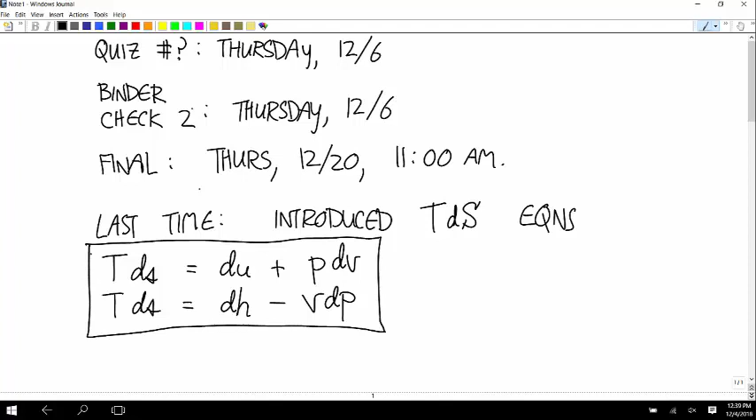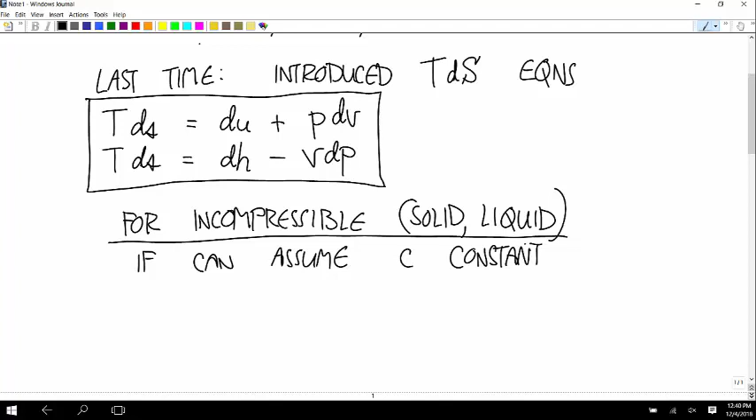Then we had some simplified versions of this. If you have an incompressible material, a solid or a liquid, and if you can assume that the specific heat is constant—that's not always the case, but it's often a good approximation for solids and liquids—then the change in specific entropy is equal to the specific heat times the natural log of the later temperature divided by the earlier temperature.

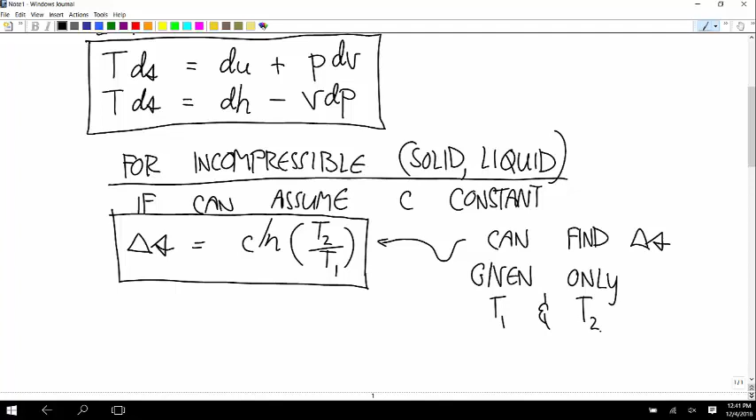What's useful about this form is that you can find the change in specific entropy given only T1 and T2. Just with those two temperatures at the two different instants, you can calculate the change in entropy. Okay, that's if it's a liquid or a solid, if you can treat it as incompressible.

Then we also have an approximation if you can assume a gas is ideal. You get a more simplified form if you can assume that the two specific heats are constant—most of the time you won't be able to do that. So the form we're going to use says the change in specific entropy is equal to S0 at T2 minus S0 at T1 minus R times the natural log of P2 over P1.

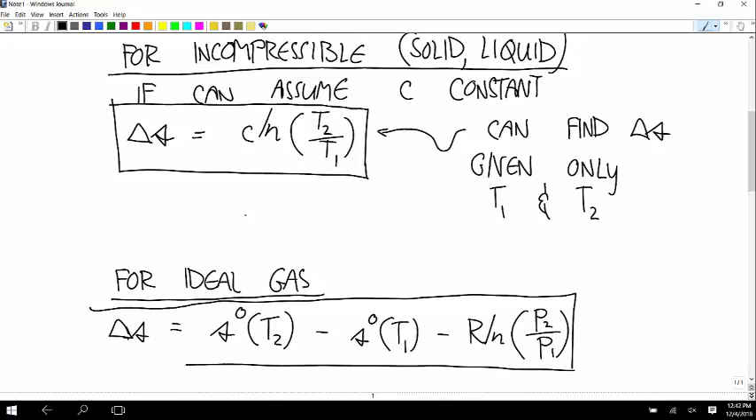So if you can model the gas as ideal, this says you can find the change in specific entropy, not as easily as for an incompressible material, but still given only the two temperatures—and this time you also need the two pressures. So incompressible needs a little less information, ideal needs a little more. But both are simplified compared to the overall TdS equations.

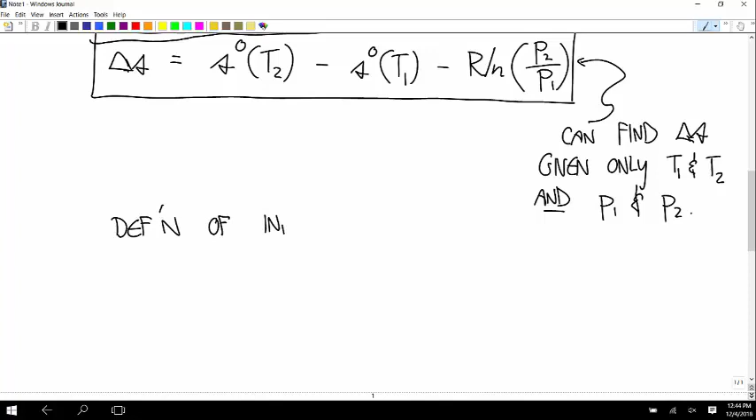So now we have some ways to calculate entropy. We know we can look it up in the table—the definition of entropy. Who remembers the definition of entropy? Okay, so yeah, that's sort of an intuitive idea. Anyone remember, like, mathematically how you calculate it?

So the definition of the entropy change from state 1 to state 2.

The change in entropy is equal to the integral from state 1 to state 2 of, and this is that Clausius integrand, dq over t, over the whole boundary, for an internally reversible engine.

Okay, so what that says is, say that you have a blob of pudding, and it starts at this temperature and this pressure and ends at this temperature and this pressure. How do you get from this state to that state? It doesn't matter for calculating the entropy, because no matter how you get there, the way you calculate entropy is you calculate this for what an internally reversible engine would do, what would happen if you went from this state to this state using an internally reversible process. And that's how you calculate the change in entropy no matter what process it is.

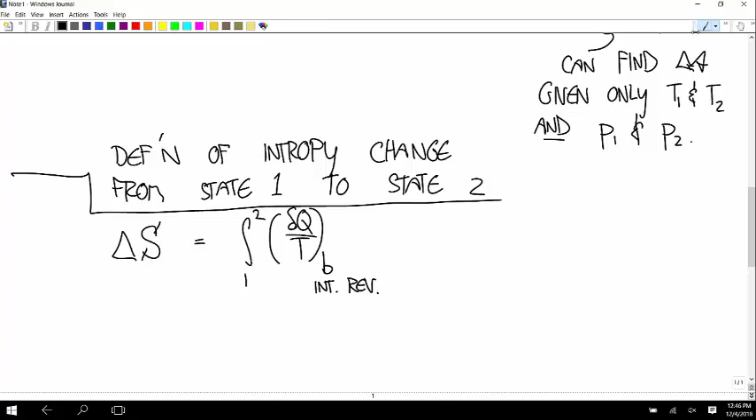Okay, so that idea of an internally reversible engine or process is built into this. Okay, so now we're finally ready to talk about the closed system entropy balance.

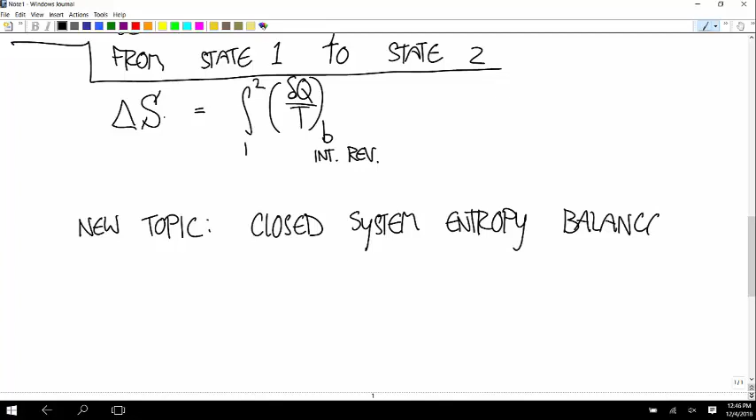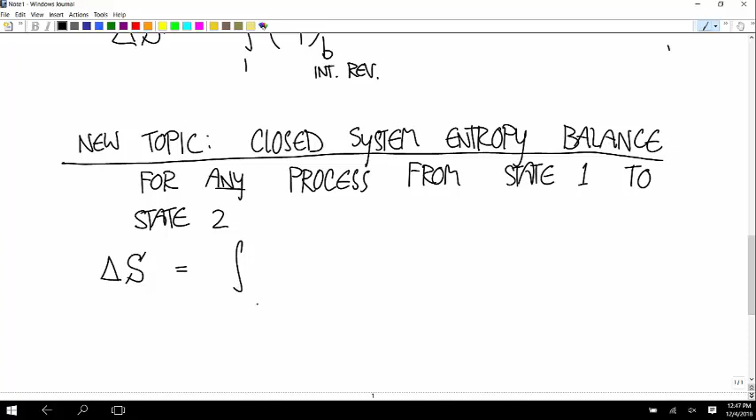Okay, and so this says that for any process, state 1 to state 2, the change in entropy is equal to the integral. Now this is going to look familiar. From state 1 to state 2 of dq over t at the boundary, plus some value sigma.

Okay, so first let's figure out what these different terms say, and then let's figure out what this says about sort of the second law of thermodynamics. This is like a statement. We can think of this as our mathematical statement of the second law of thermodynamics. This is the second law. Basically, the second law is sort of built into this.

So first of all, what's the difference between these two things? This is our definition of the change in entropy, and there's no constant sigma here. And now we have this new thing with a constant sigma here. What's the difference between those two statements? This is important for wrapping your head around this stuff.

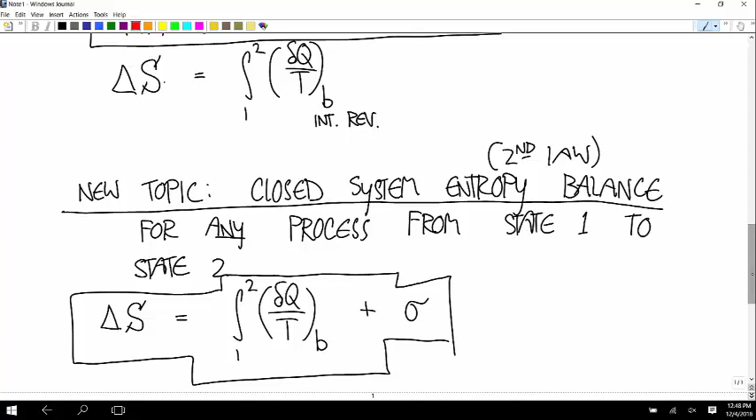So this is what you get for this integral for the actual process, not internally reversible. I mean, it could be an internally reversible process, but this is the actual, what's actually happening in your system.

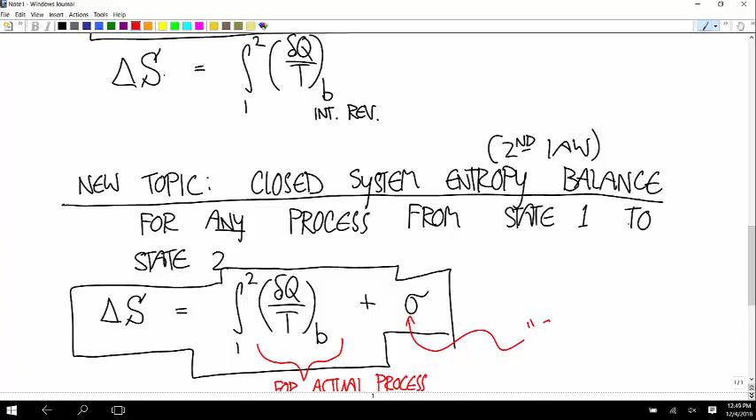And this is called the entropy production. And this sigma always has to be greater than or equal to 0. When would you guess sigma is equal to 0? Well, it's equal to 0 if the actual process is internally reversible. If there's no irreversibilities in the process, then we just get back that definition of entropy, and there's no sigma there. So it's equal to 0 for an internally reversible process.

It's greater than 0 for any process with irreversibility.

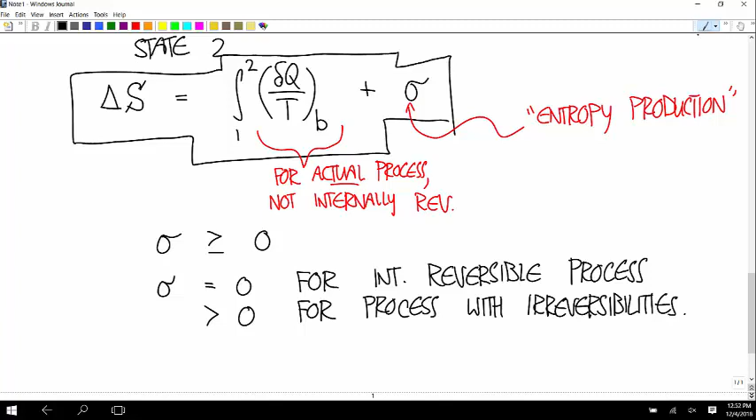So let's see how that works. I'll do an example with a heat engine where it's internally reversible, and then do one where it has irreversibilities.

Well, it's sort of following the same thought process, but make sure that you understand the difference between what the Clausius inequality is saying and what this stuff is saying. All this stuff is subtle, but it's important for understanding how to do these problems.

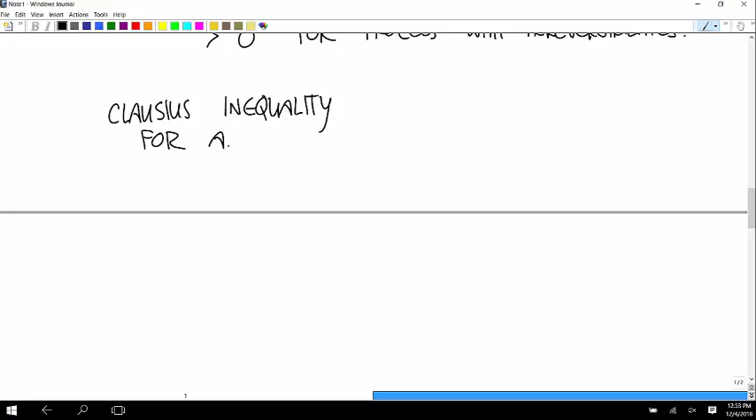The Clausius inequality says that for any cycle, the integral over the cycle of dq over t all around the boundary is less than or equal to 0.

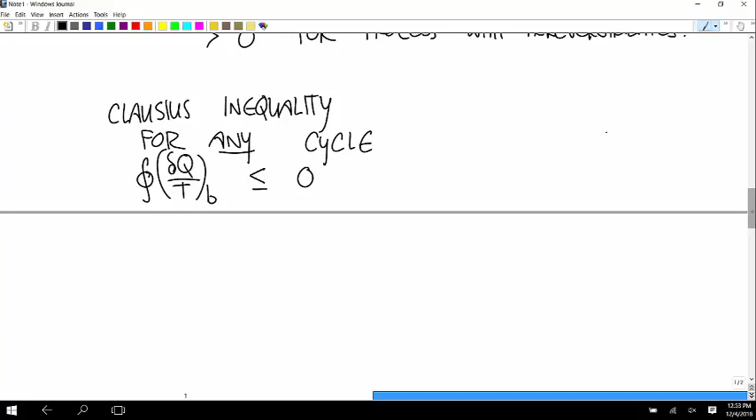So one of these inequalities, this is a less than or equal to. These new ones, this sigma is a greater than or equal to. And we use these things in different ways.

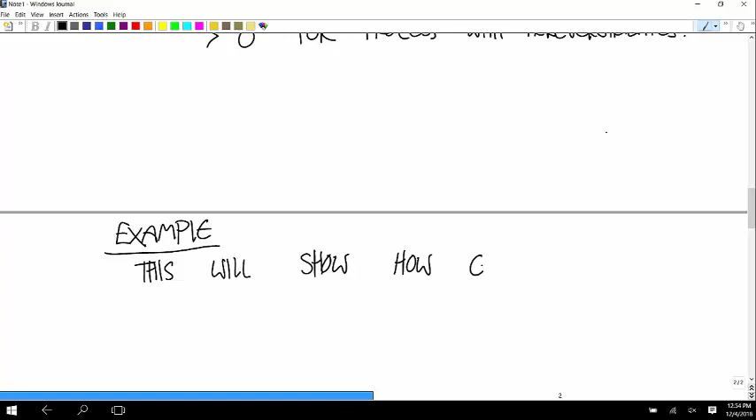Okay, I'm going to erase that. So let me do an example. This is just designed to show how entropy production, or entropy, is produced when a process has irreversibilities.

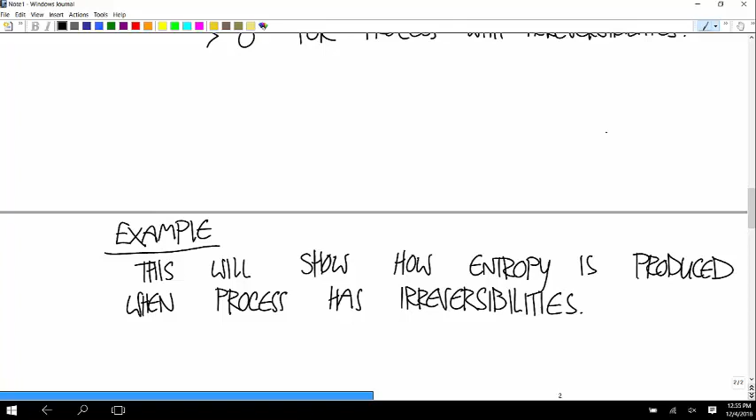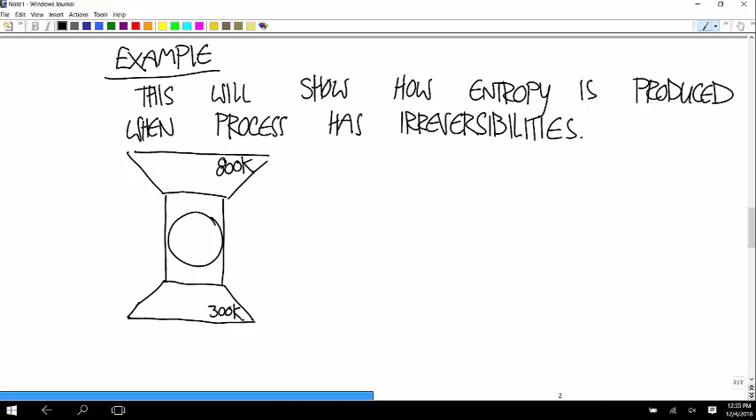Okay, so let's say there's this heat engine. At the hot reservoir, let's say the temperature is 800 Kelvin, and at the cold reservoir, let's say the temperature is 300 Kelvin. It's a power cycle, so work is done by the system. Heat energy comes in from the high temperature reservoir, and that's, let's say, 1,000 joules. And then we know that heat is going to be lost to the low temperature region. I'm going to call that QC. That's going to have different values for reversible and irreversible.

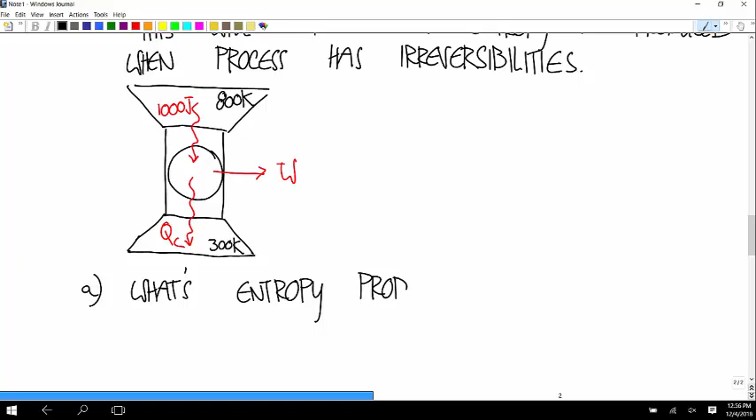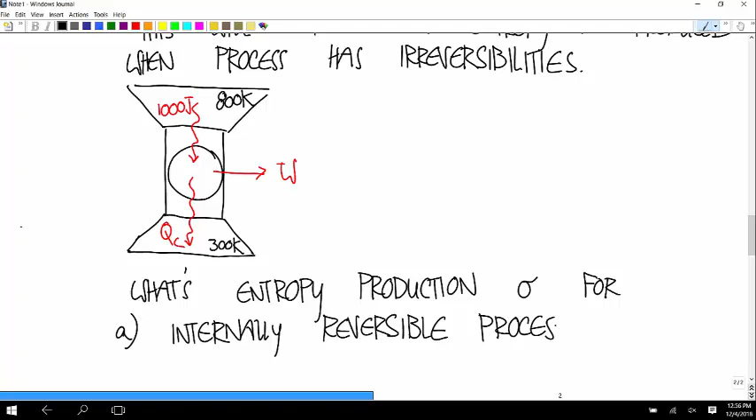So what's the entropy production, sigma? We're going to do this in two cases. What's the entropy production for part A? Let's do it for an internally reversible heat engine process. And then second, with irreversibilities present. Okay, so

Before we do this, what do we expect the numbers to show? What do we expect to be the entropy production for an internally reversible process? The idea is that entropy production only happens if your process has irreversibilities. So if we have an internally reversible process, then sigma is going to be zero. Then if we use values that show there are irreversibilities, sigma has to be positive.

I'll get this in writing in a minute, but one of the reasons that entropy production value is a helpful thing to calculate is because it tells you how many inefficiencies you have. If you have a big value of entropy production, there are probably a lot of places that you can improve your system.

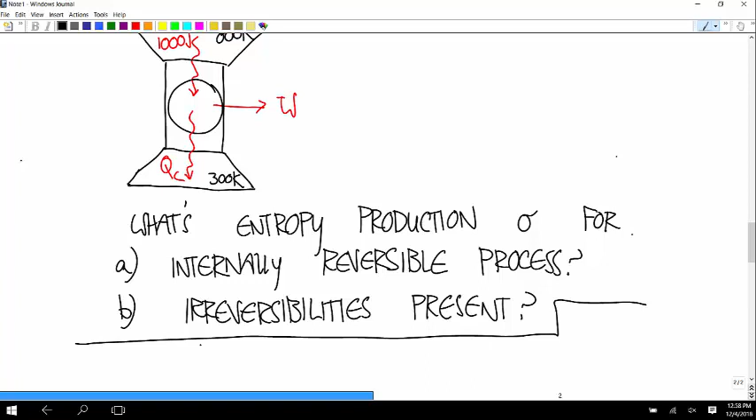Okay, so for an internally reversible process, what's going to change in our numbers here? We've done an example sort of like this before. If we say that this is internally reversible, we can calculate a value for Q sub C. And if we say it has irreversibilities, we can sort of specify a value for Q sub C, but it does have a limit on it. It has to have a relationship between the QC that we got for internally reversible. One of those two has to be bigger than the other one.

So what do you think, intuitively, what makes sense about QC? This is heat that's lost in the exhaust. Would you expect a bigger chunk of the heat you add to your system to be lost in the exhaust for a very efficient or a very inefficient system? In an inefficient system, yeah, like if this is a terrible heat engine, just all of this drifts out into the exhaust and no work is done. So the better the heat engine is, the more of this goes to work and the less goes to here.

Okay, so we can calculate what QC is for internally reversible, and we'll get a number for that. And then we'll just choose some number bigger than that to represent a cycle, or a process, with irreversibilities. And what we're going to see is that sigma is 0 for the internally reversible, and sigma is positive for the irreversibilities.

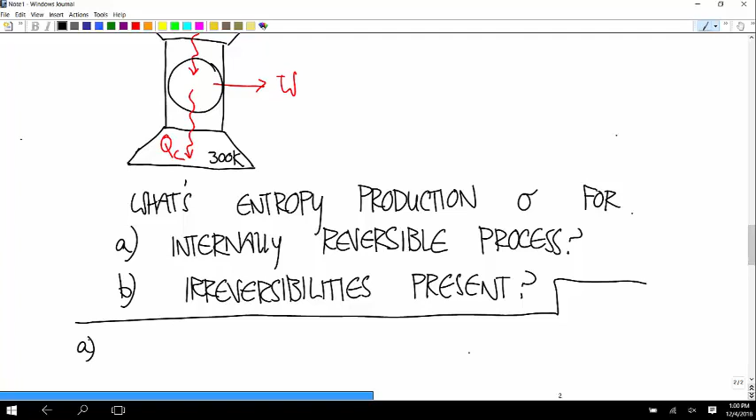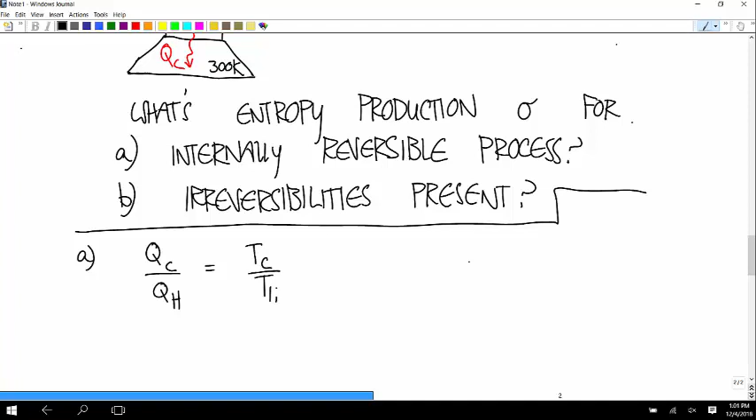All right, so how are we going to figure out Q sub C for a reversible system? Yeah, perfect, yep, so that's based on the Kelvin scale. The way we measure temperature has to do with a relationship between heat transfers for a reversible process, for a reversible heat engine. So QC over QH is equal to TC over TH in an internally reversible process.

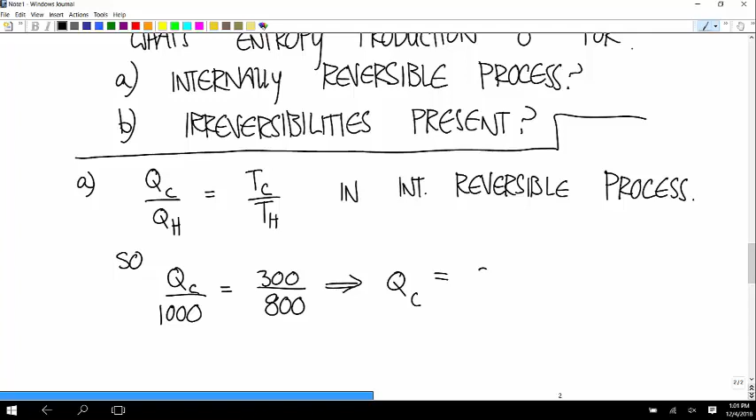So Q sub C over 1,000 is equal to 300 over 800. And so QC, if you just cross multiply for that, is 375 joules. Okay, so for any reversible power cycle, that is the heat that has to be lost to the cold reservoir. That has to be QC if this is reversible.

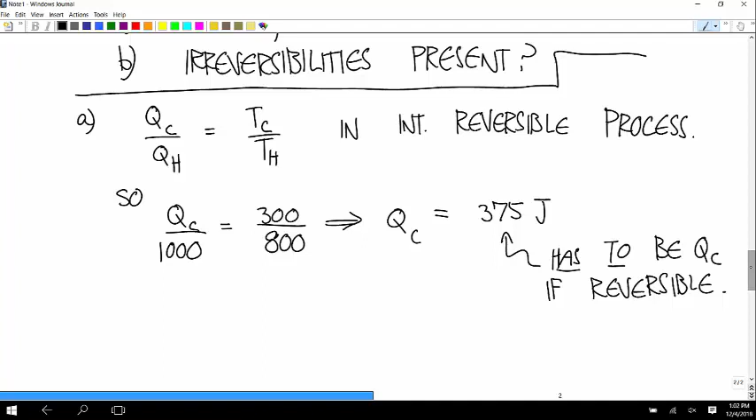Okay, so now we're going to use the entropy balance. So the change in entropy is equal to the integral from state 1 to state 2 of dq over temperature at the boundary, so anywhere along the boundary, anywhere that there's heat transfer, plus sigma.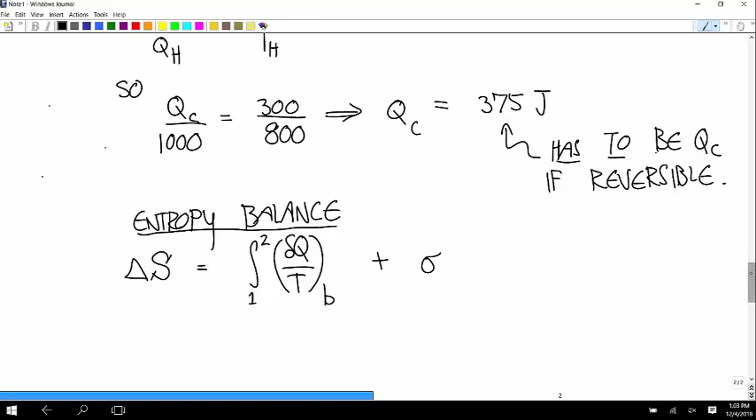The definition of the change in entropy is what I have up above: change in entropy is equal to the integral from 1 to 2 of dq over t around the boundary, for an internally reversible process.

This here in the equation for the entropy balance. That term is not necessarily a reversible, internally reversible process. This is the actual process.

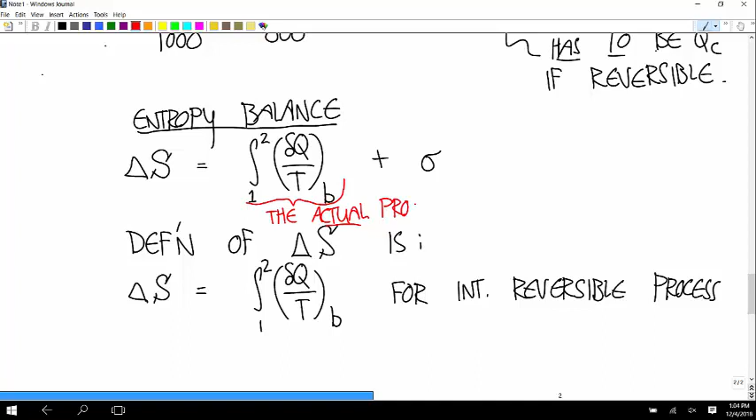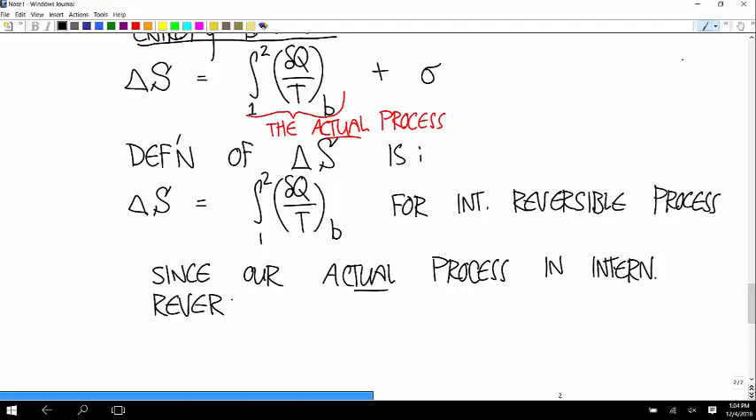But since our actual process in this case is internally reversible, if I rewrite this equation, we have that the integral from state 1 to state 2 of dq over t for an internally reversible process is equal to the integral from state 1 to state 2 of dq over t for our specific internally reversible process, plus sigma.

What do we know about this integral dq over t for different internally reversible processes? That internal reversibility makes it path independent. This integral has the same value for any internally reversible process, and that means these are the same. So sigma is equal to 0.

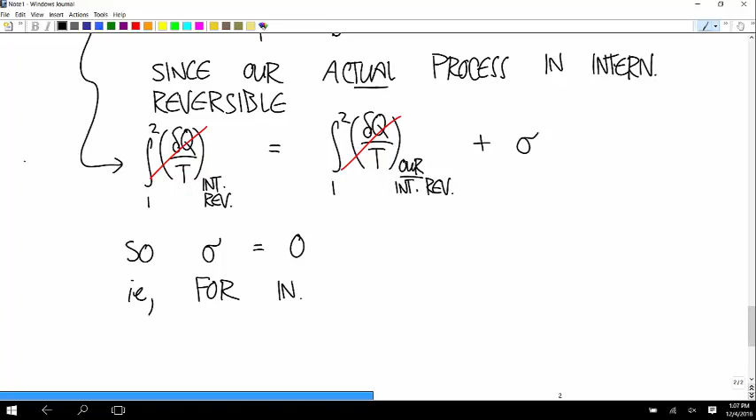In other words, for an internally reversible process, entropy production is 0.

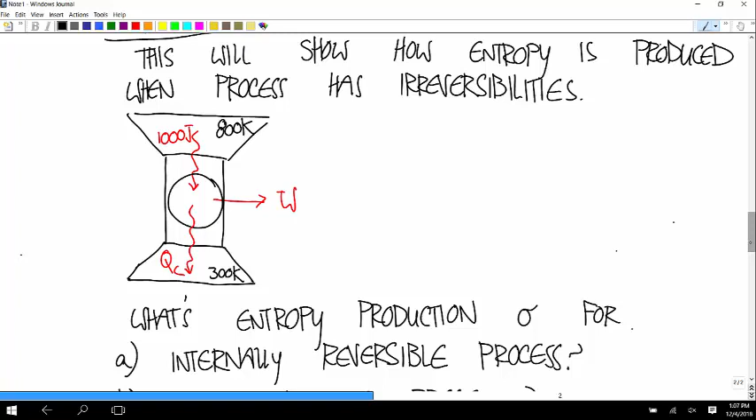Now let's see what happens if you have a real process. What did we say the deal was with QC? For a process with irreversibilities, is QC bigger than 375 or smaller? QC has to be greater than 375 joules.

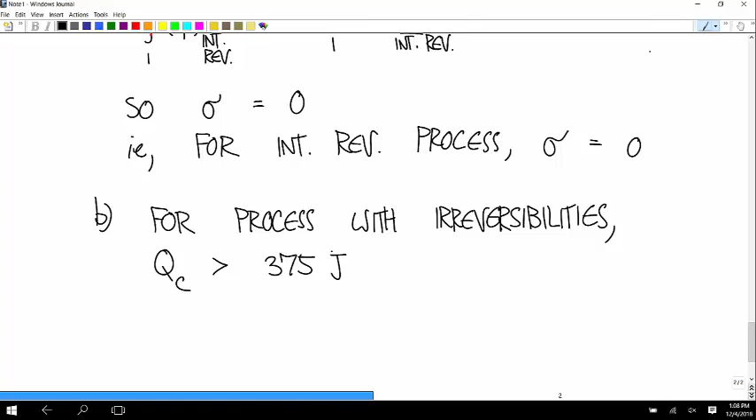So let's say 500, nice round number. We'll say QC is equal to 500. Okay, well, the entropy balance...

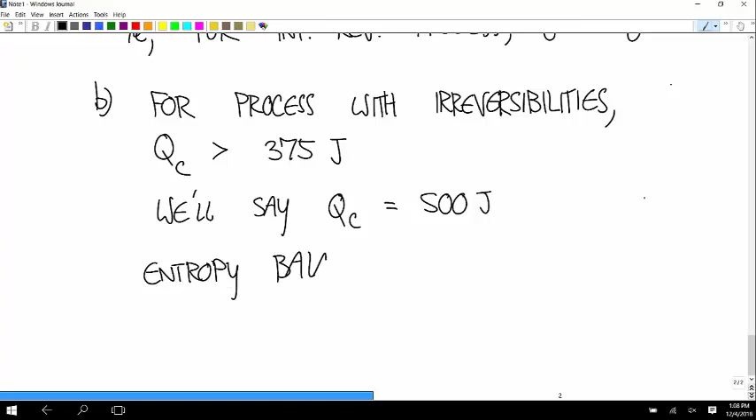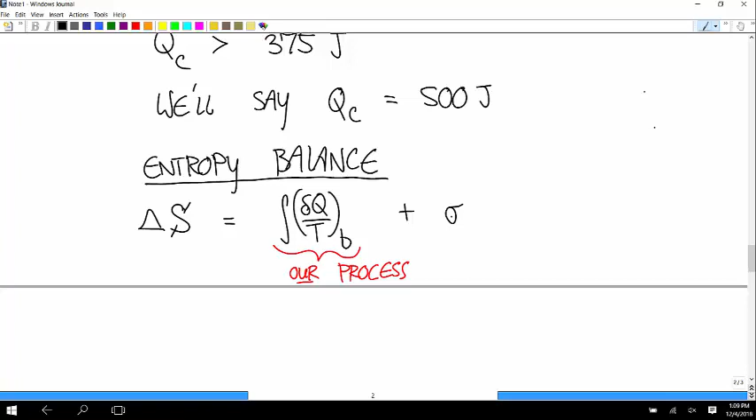The entropy balance says that the change in entropy in the system is equal to the integral of dq over t around the boundary for our specific process, not an ideal process, plus the entropy produced, the integral of dq over t for our specific process.

The heat that's being added to our system is the heat coming from the boiler, high temperature. So that is 1,000 joules. That's positive because it's being added to the system, divided by a temperature of 800.

And then for our specific system, the heat being lost is 500, and that's at a temperature of 300 Kelvin. So what do you get for this? Negative 1.54. Is that right? That's 1 2/3 minus 1.25. Negative 0.42.

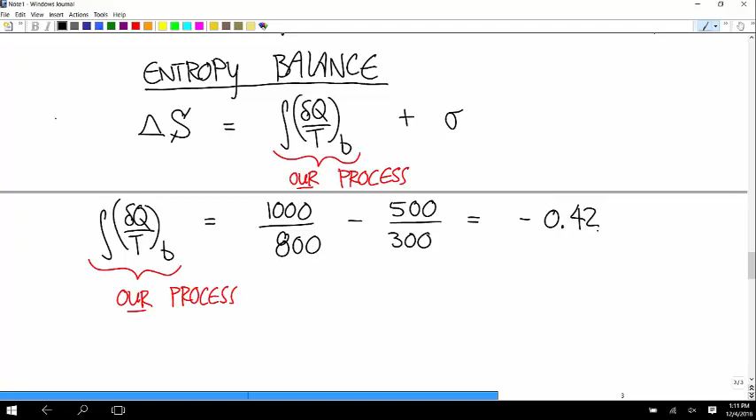And what about the change in entropy? Can we calculate that? That is equal to the integral of dq over temperature in the internally reversible case, and we have the values for that too.

So for an internally reversible process, this would be, we still have 1,000 coming in at the boiler, so 1,000 divided by 800, minus, this time we're only losing 375 joules at the condenser, so 375 over 300. And what do you get for this?

Really? 1,000 over 800. Is that right? Okay, there you go. There must be a reason for that, but it doesn't occur to me right now.

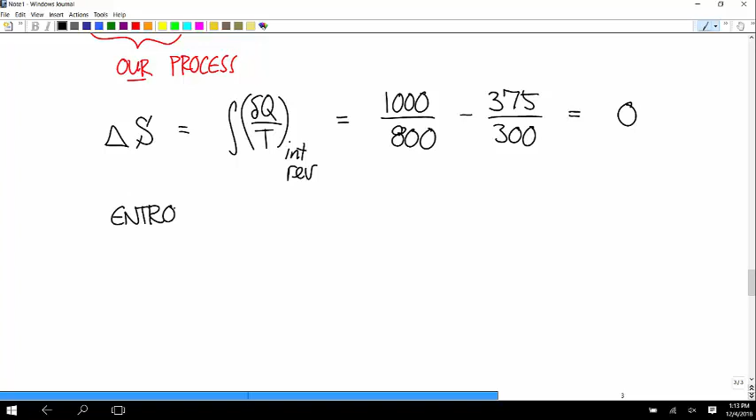So if we set up the entropy balance equation, it says that 0, the change in entropy, is equal to negative 0.42 plus sigma. And so sigma is equal to 0.42, and this is in joules per Kelvin.

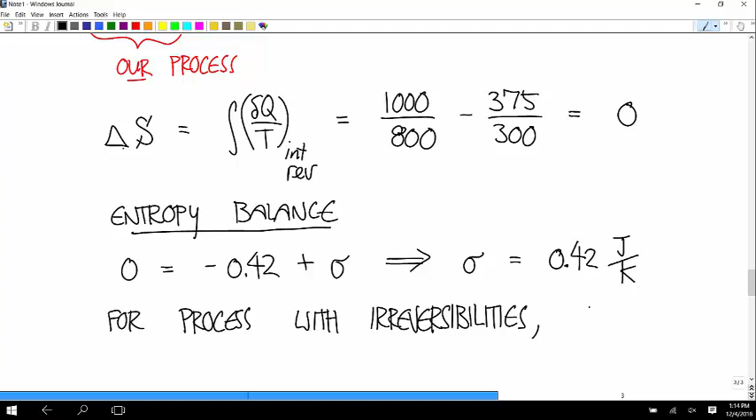So for a process with irreversibilities, sigma is greater than 0, and that means that entropy is produced. Any questions about that?

Mm-hmm. Yeah. Hmm. Yes.

Sigma is always going to be zero. Um, it's not—the change in entropy isn't going to always be zero. Even then, the change in entropy isn't going to be zero, because remember, the definition of change in entropy uses an internally reversible process, and we know entropy is different at different states. So there was something special about the set of states I chose here that made the change in entropy zero.

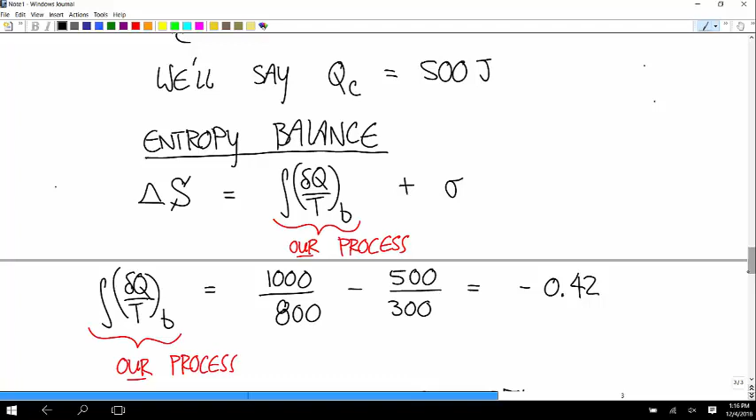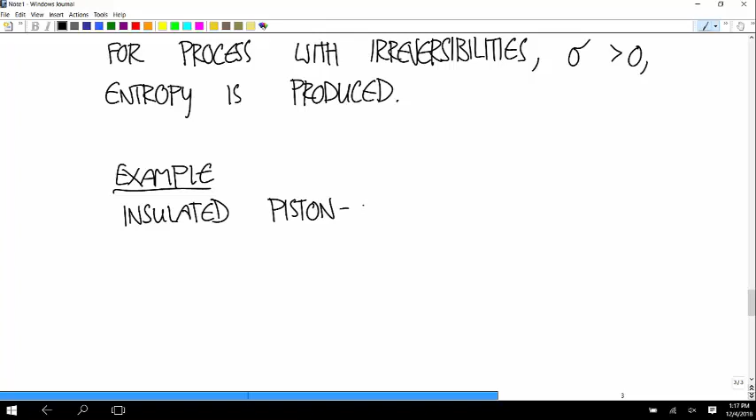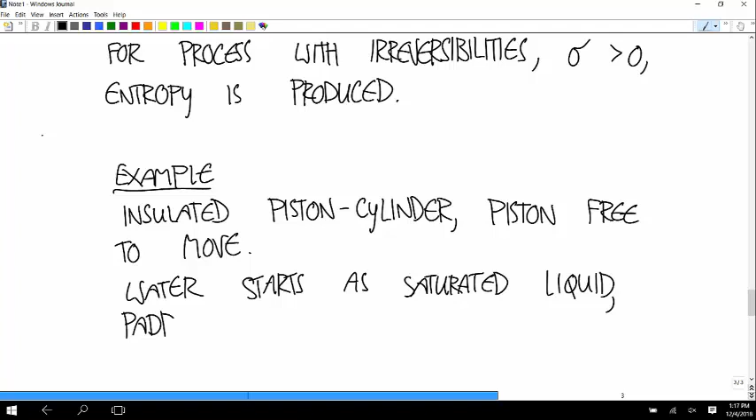All right, let's do another example problem. Let's say that we have an insulated piston cylinder system, and the piston is free to raise or lower. Inside we have water, and it starts as a saturated liquid. A spinning paddle wheel on the inside increases its internal energy until it's a saturated vapor.

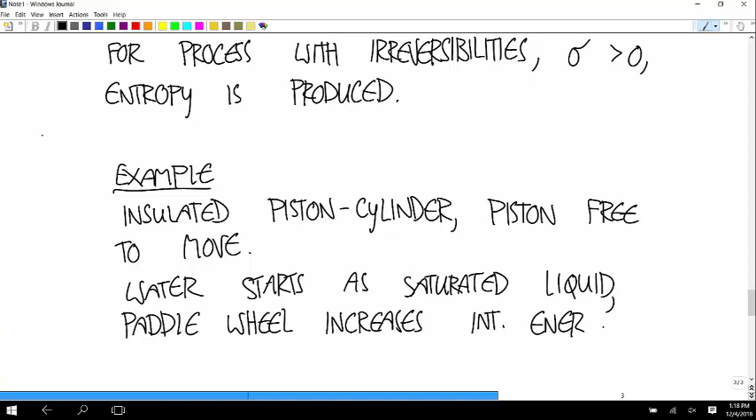Okay, and we want to calculate. So first, what is the net work input divided by the mass of our system? And then second, what's the entropy production per unit mass? So what we're trying to find is sigma over m.

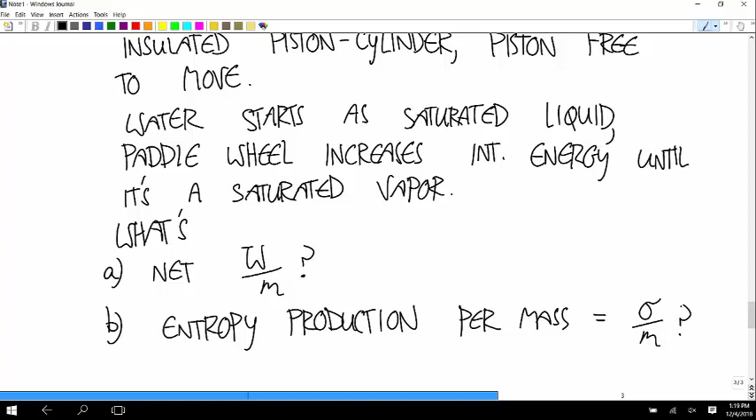Okay, well, to calculate the work, how are we going to figure out what the work is? We know that we can't use any entropy equation to calculate something involving work because that never comes up in any of the entropy equations.

So let's look at the first law. It says the change in internal energy is equal to the heat added minus the work done on the surroundings.

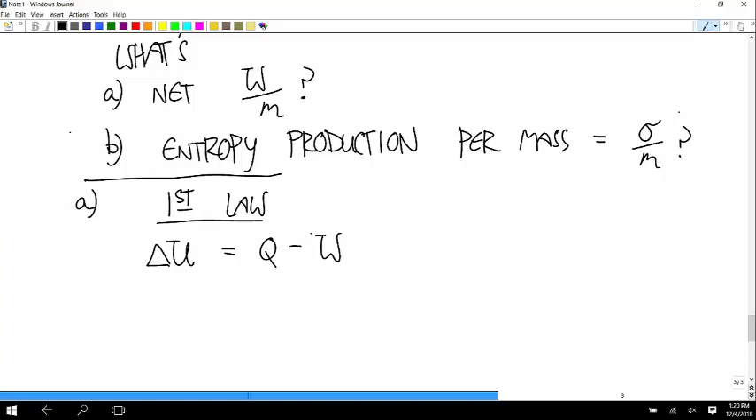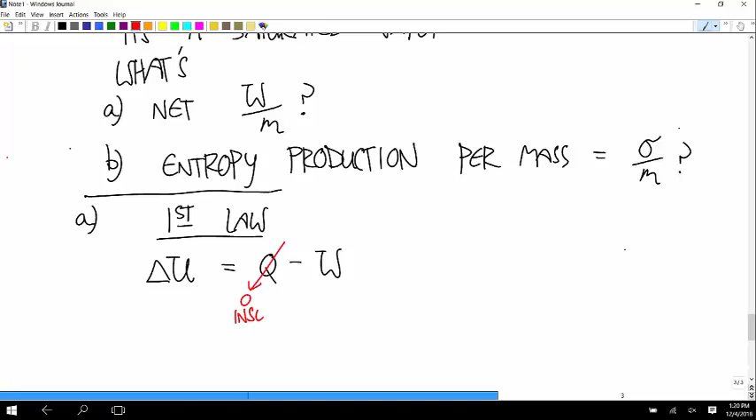Is there anything we can simplify here? There's no Q yet, because it's insulated. And so this equation says that the change in internal energy is equal to the negative work.

And we can rewrite this as work if we divide both sides by the mass. The work per mass is equal to negative change in specific internal energy, because specific internal energy is just the extensive internal energy divided by m. And so this is negative of specific U2 minus specific U1.

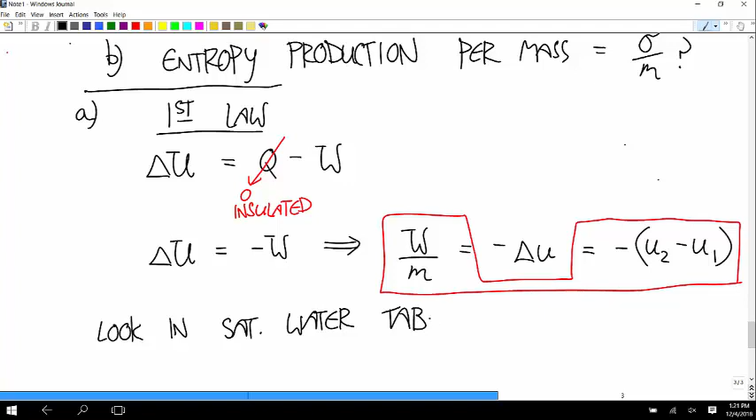And now we can look this up in the table. So look in the table for saturated water. I didn't give you some information here. Oh yeah, this is important. It starts as a saturated liquid at a given temperature, at 150 degrees Celsius. So we're going to look in the saturated water table at 150 degrees Celsius, and that corresponds to, well, we don't care what the pressure is, but that happens to correspond to a pressure

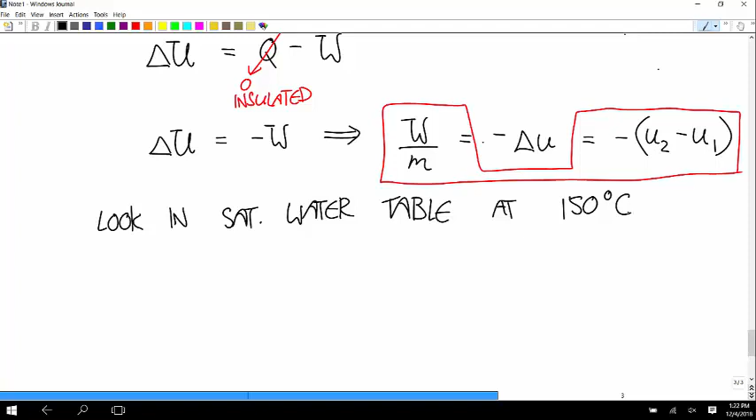of 4.758 bar. And it gives us a U1 that's equal to 631.68 times 10 to the third joules per kilogram. The U2 of 2559.5 times 10 to the third joules per kilogram. It's the same table, but this is just using UF and UG.

Any other questions about that? Looking this stuff up. Okay, so now that we have that, we can say the work per mass is equal to negative quantity 2559.5 times 10 to the third minus 631.68 times 10 to the third. And that is negative 1,927.82 times 10 to the third joules per kilogram.

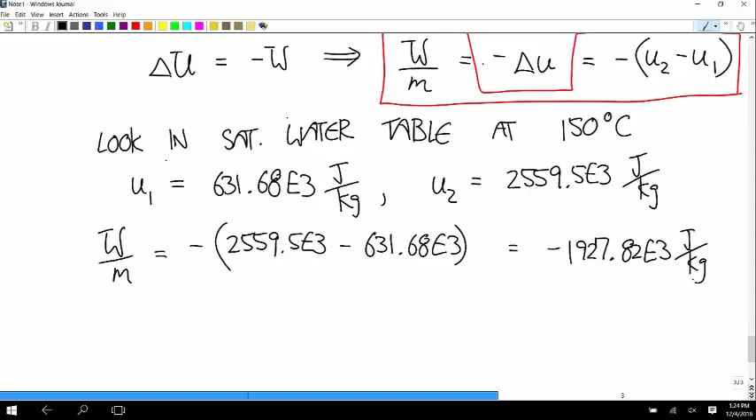Any questions about that? Okay, so now for B, we're trying to calculate the entropy production. So we'll use the entropy balance equation.

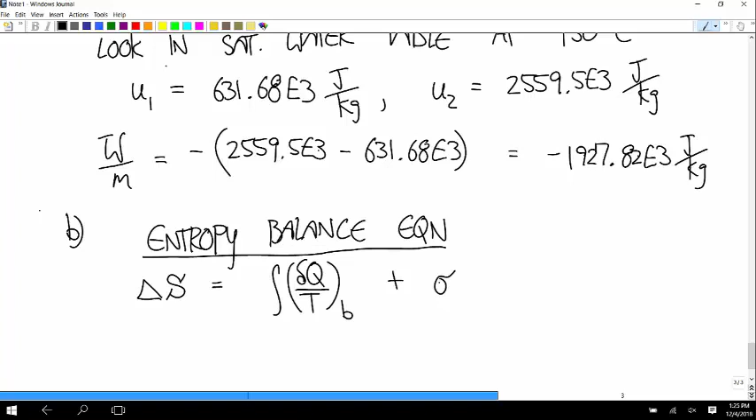And that says that the change in the extensive entropy is equal to the integral of dq over temperature along the boundary plus the entropy production. And I'm going to divide everything by m to get that entropy production in the form that we want. So we have the change in the specific entropy is equal to 1 over m times the integral of delta q over t at the boundary plus sigma over m.

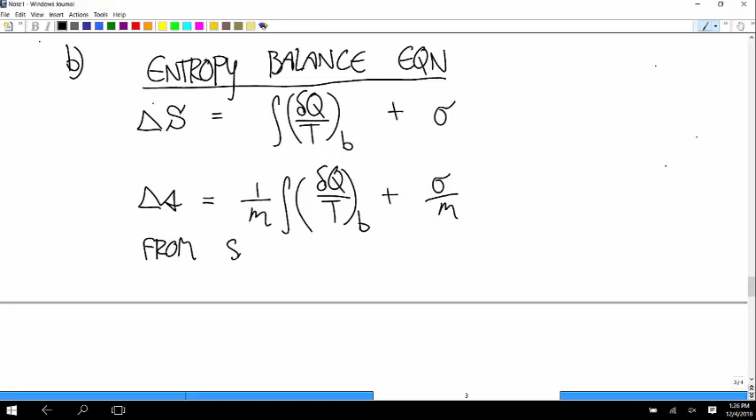Okay, well, the change in specific entropy, we can look that up. So from that saturated water table, S2 minus S1 is 6.8379 minus 1.8418. So you get 5.00. This is in kilojoules per kilogram times Kelvin.

Okay, so we know the change in specific entropy. What do we know about this second term? So this integral here, is that for an internally reversible process, or is that for our actual process? Our process. And what do we know? What's the first word describing our process in this problem? Maybe the second, maybe the first one is an... No, insulated. So if it's insulated, there's no heat transfer in or out of our system. And so this integral goes away.

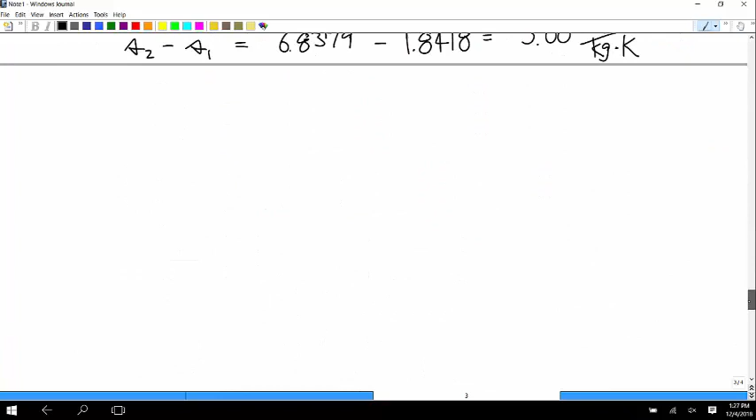Any questions about that? And so we just have that 5 kilojoules per kilogram Kelvin is equal to sigma.

So I think, yeah, thank you. Yep. Any other questions? Yes. Okay.

Yeah, that's a good question. So to think about entropy, remember that entropy is a property. You can look it up in a table. So you can look up the change in entropy just based on knowing the beginning and end states. You don't know anything about that process when you calculate the change in entropy. You're just getting it out of a table, and that table has no idea what your specific process is. So actual entropy cannot be calculated from our specific process. That has to be some kind of universal process. And the only thing like a universal process we have is the idea of internally reversible. So entropy itself is defined in terms of taking that integral for an internally reversible process. There's no other way it could be for that to be a property that has values in a table. Anybody want me to clarify that?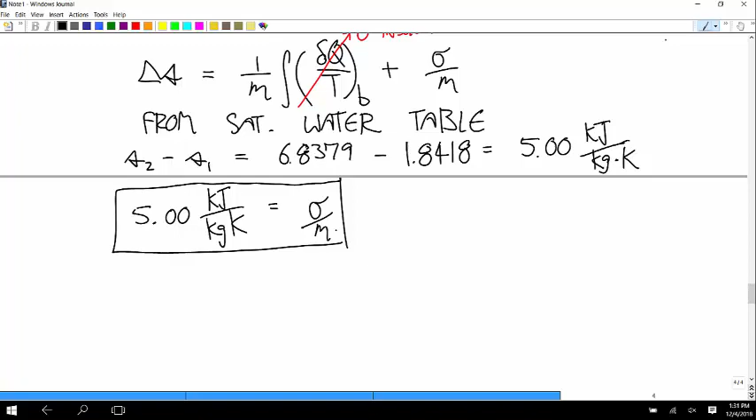Okay, let's go back to the equations, the big equations. So really, here are the two that can cause all the confusion. The first one is the definition of entropy.

You can think of this as the equation that lets us put entropy in the table. Since the table was made before, it doesn't have anything to do with any specific process. That can't depend on the process that we have. So it just makes sense that this would have to be an internally reversible process that you use to define entropy. But now this is not used to define entropy.

This is saying once you define entropy, we could take this integral for the internally reversible process and substitute it in here. But this equation is what lets us calculate the entropy production for a specific actual process. And so if this is some kind of idealized thing that doesn't know anything about our process, then this has to be something specific to our process, or this would be an idealized thing too.

So just remember, this is the definition, based on ideal stuff. This is how you get your hands dirty and calculate your produced entropy for a specific process.

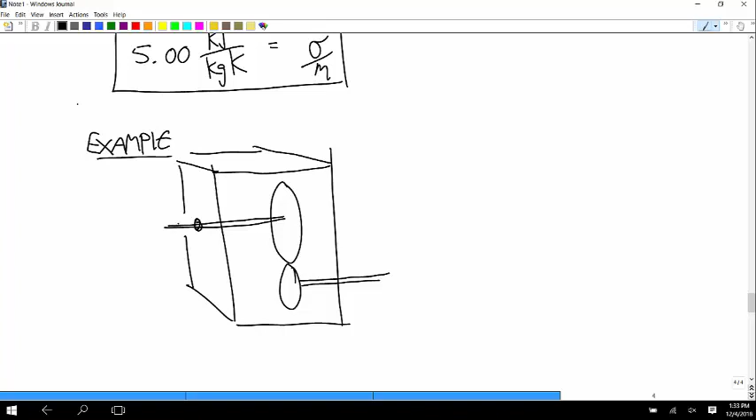Okay, let me do another example. So let's say we have a gearbox, and it could go either direction. But let's say that we're putting energy in here, and let's say that's 60 kilowatts of work, and then we're getting energy out here, and that can't be any more. It's always going to be a little bit less energy because of friction and all the stuff going on inside. Let's say that's 58.8 kilowatts.

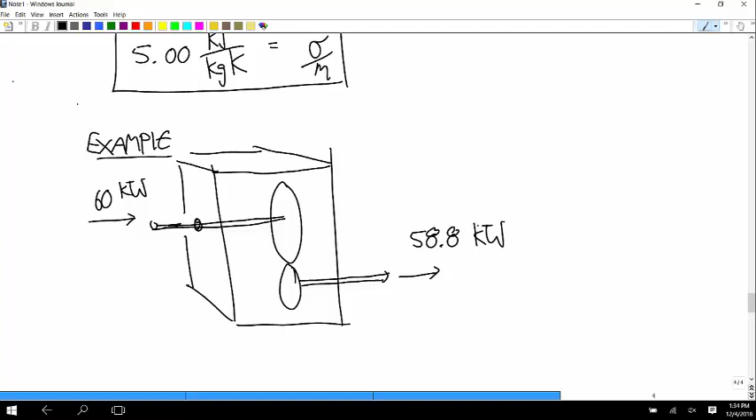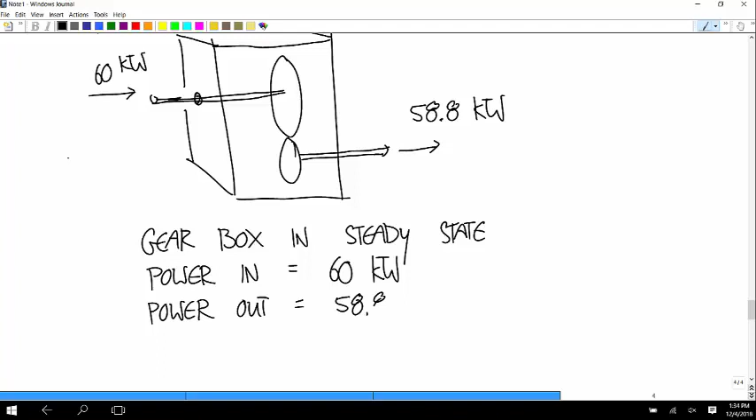And let's say that it's in steady state. So this is what I drew up above, but the power coming in is 60 kilowatts, and the power out is 58.8 kilowatts. And the temperature at the boundary of the box is 300 Kelvin. What's the entropy production?

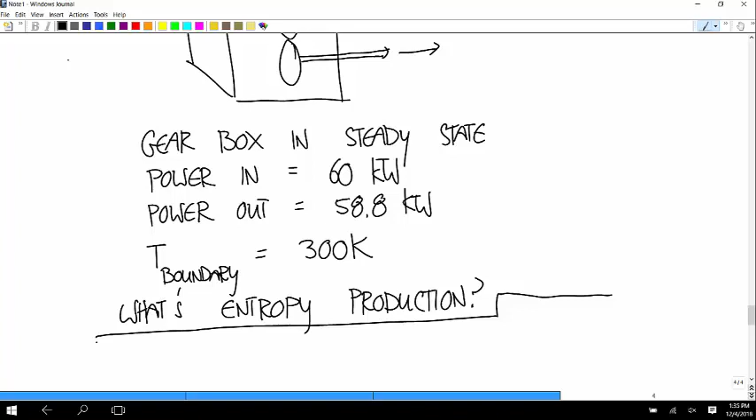All right, well, this problem gives us rates of work. And anytime you see work, you know you can't do it all with entropy stuff because that doesn't come up in any of the equations. So we're going to have to start with the first law.

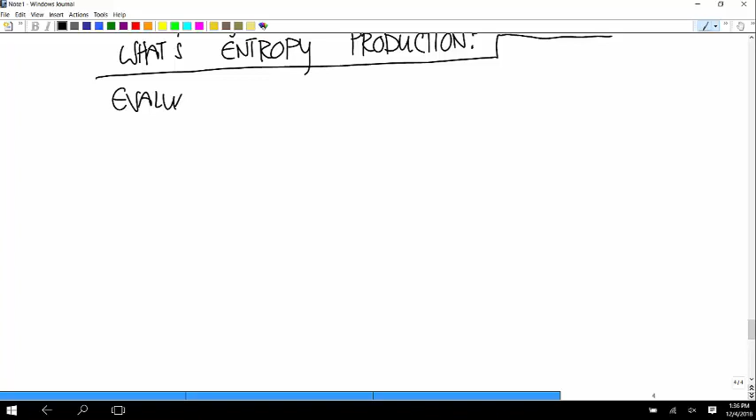Let's evaluate everything per second. I mean, you could also do it as a time rate of change version of everything, but let's evaluate per second. Then the first law says the change in internal energy is equal to the heat coming in minus the work being done.

Do we know anything that'll let us simplify this? It's steady state. So what does that let us cancel? Yeah, there's no change in U. And so this says that the heat coming in is equal to the work going out.

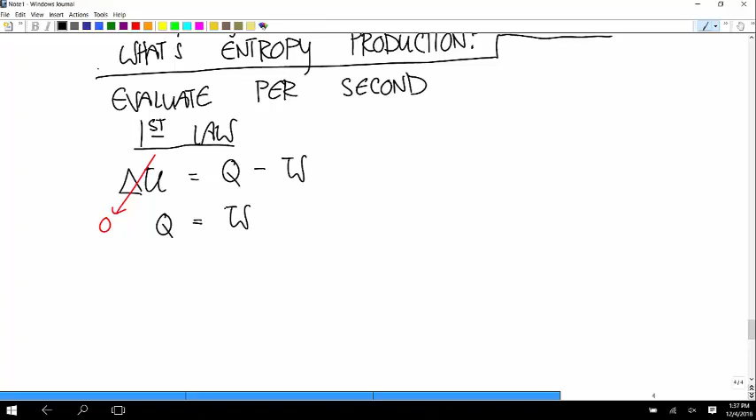And now the work going out, let's think about that. So W is equal to... we have one work coming in and work going out. The one going out is the positive, so that's positive 58.8. This is in kilojoules now. The work coming in is negative, and that's 60. And so W is equal to negative 1.2 kilojoules. And so Q is equal to negative 1.2 kilojoules.

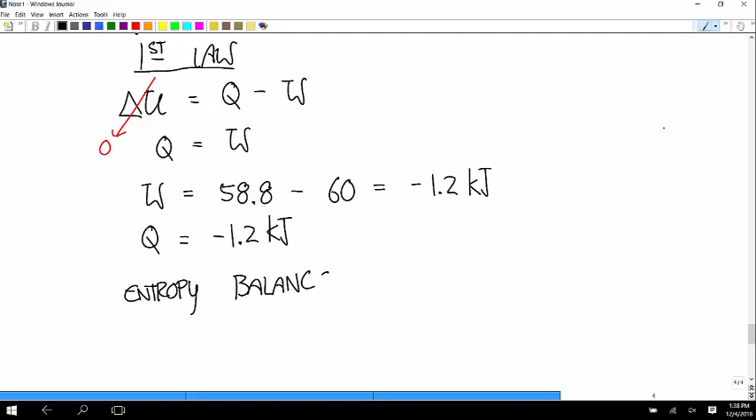And now we can calculate the entropy production. So we'll go to the entropy balance equation. The change in entropy is equal to the integral of dq over t around the boundary plus sigma.

And now there's something we can simplify here, just like there was in the first law, because this is steady state. What here goes away because of steady state? Yeah, the change in entropy is zero because entropy is a property and properties don't change in steady state. So this is zero because of steady state, same as this. Anything you can look up in the table in a steady state process doesn't change.

And so now we have 0 is equal to the heat. So we have negative 1.2 kilojoules coming in, or 1.2 kilojoules going out. So in the sign convention for the entropy balance, that's still negative. So we have negative 1.2 kilojoules divided by the temperature at the boundary, which is 300 Kelvin. And so we get negative 0.004, this is plus sigma. So sigma is equal to 0.004 kilojoules per Kelvin, or 4 joules per Kelvin.